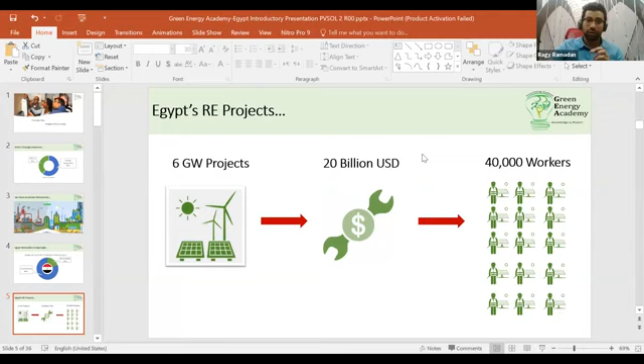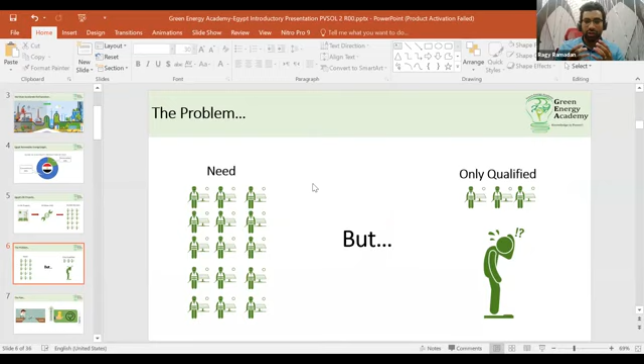These investments and projects will require thousands and thousands of qualified workers and engineers in the field of renewable energy, either solar or wind. This leads to the problem for which the Green Energy Academy was founded since 2011: there is a big need for qualified workers, engineers and employees, but the qualified personnel in specific countries are very limited, which creates the problem.

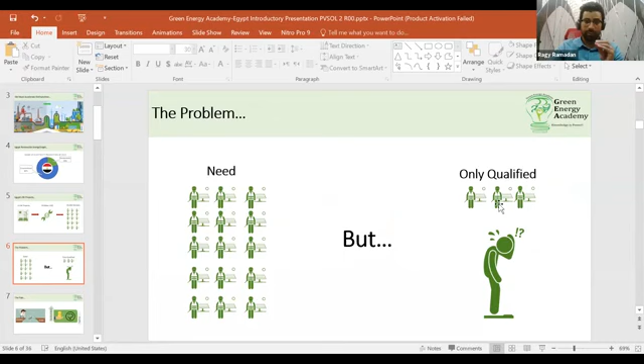This problem actually comes from the fact that there is a big gap between what we learn in schools and other educational institutions, such as universities or engineering colleges, and what the market actually needs - here I'm talking about the job market. You may face situations where you need to start up your business, or join a company or secure a vacancy, and this vacancy will require a lot of technical and soft skills that you didn't learn in university or school.

So the other problem is that it happened with many of us: we paid a lot of money to other renewable energy training providers and got very little quality that was not up to our expectations, failing to gain the required skills in order to join the job market or start up our business.

And from this perception, the Green Energy Academy came. The Green Energy Academy is an Egypt-made international company that delivers world-class renewable energy services, specifically in the fields of trainings or capacity building, consultations or consulting services, and engineering.

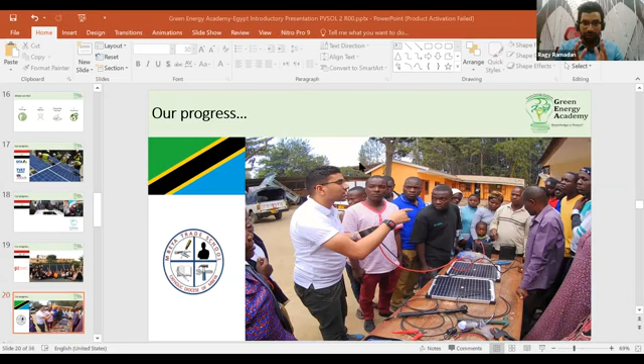We also, in addition to the trainings, delivered consulting services in order to help small companies or startup companies in the field of solar energy to register their company, to business develop their company, to help them generate leads, and also to help them in their early stage project management and early stage project references, such as doing engineering for some projects and installations for some projects.

In this slide, it was the end of our introducing the Green Energy Academy.

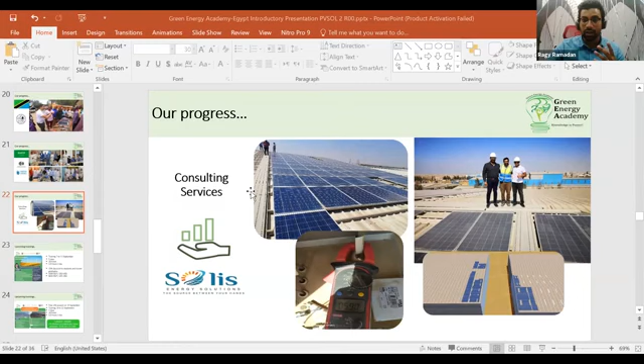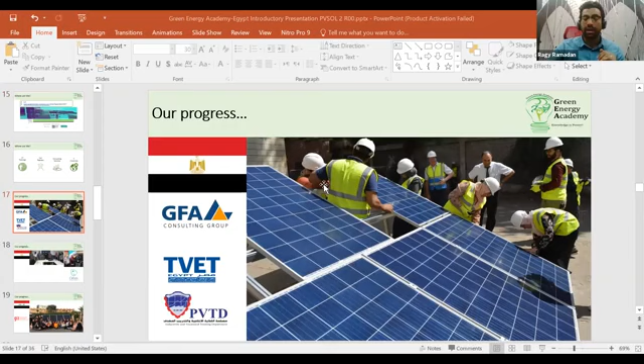Now, talking about the trainings - in the last period we announced about 3 online trainings. One of them, which already passed, is the Wind Energy Basics. It was from the 7th of September to the 11th of September, for 5 days.

The upcoming training will be the Solar PV online training, the professional design and simulation of on-grid systems using the software PV*SOL premium 2020. This is going to be from the 18th of September to the 22nd of September, which means it is starting this Friday, already starting soon.

We have many registered and confirmed attendees. Some of them are also attending our info session here. The training will be for 5 days, a total of 18 hours, 3.5 hours per day.

Talking about the investment or the fees - the standard fee is 4,000 Egyptian pounds or $250. However, if you are a student, an engineering student, or a student with a background about grid-connected solar PV systems, you are eligible to receive a 15% discount. Either you are a student, a recent graduate of the year 2020, or a recent graduate of the year 2019 - working or not working, you are eligible for a 15% discount, which means you will pay only 3,400 Egyptian pounds or $212 instead of 4,000 Egyptian pounds or $250.

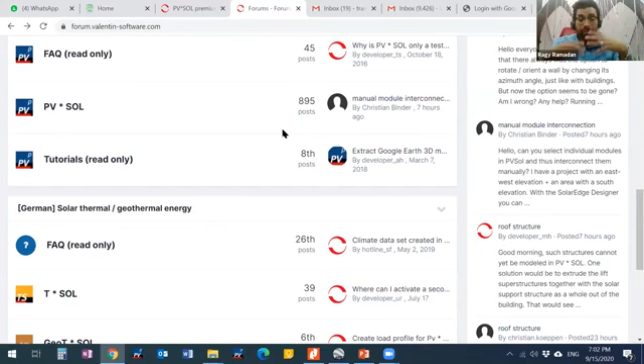Let me share my screen with you. You can easily visit the PV-Sol forum here. In this forum, you can add any question or topic you don't understand, and in less than 24 hours you will receive an answer, either from the PV-Sol Premium developers or from other members participating in the forum. Okay, sharing my screen back to the slides.

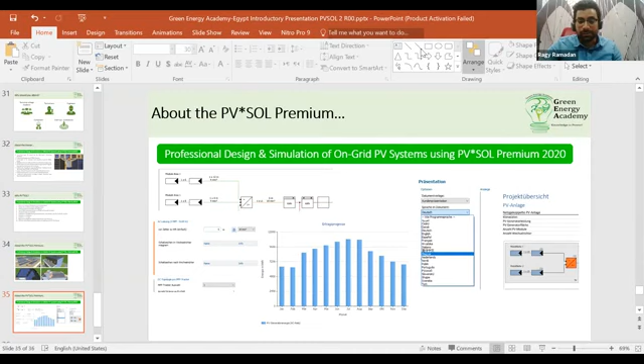Now we will open the software and go through it quickly. As you can see, these are some photos of the software. It can do rooftop systems of many types, as well as roof-parallel systems, for either residential or industrial facilities. It can generate single line diagrams and graphs and diagrams for energy productivity, producing a complete, professional, quality design and simulation of PV systems.

Now I'm sharing my screen again. I am opening PV-Sol Premium 2020. PV-Sol Premium is developed by a company.

Called, let me share the screen.

It is developed by a company called Valentin Software, under the product name PV-Sol Premium. The company is based in Berlin, Germany, and besides PV-Sol they also develop other products like T-Sol, which is similar but designs and simulates solar thermal systems, such as solar water heaters.

Either standalone systems or central heating systems. So I'm opening now the PV-Sol Premium. This is the interface of PV-Sol Premium 2020. There are two products: PV-Sol and PV-Sol Premium. PV-Sol is only for design and simulation of 2D systems, it doesn't have 3D. PV-Sol Premium has both 2D and 3D systems.

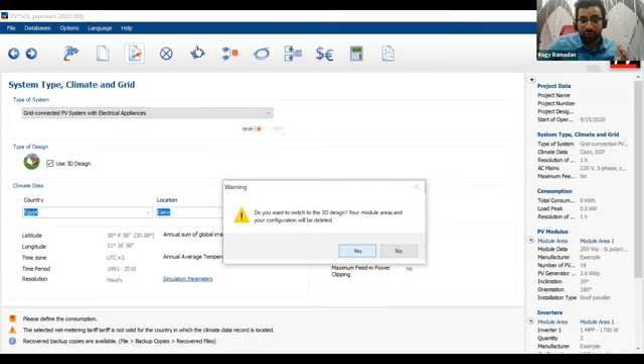Then you can select either a 2D system, or tick this option to have a 3D system. You can also select the country and location here. All countries around the world are available.

And if there is a specific location that you don't know, you can actually create climate data or location data easily from PV-Sol and save it. Here you can also enter the technical details about the AC mains, like voltage, number of phases, and power.

Moving to the next page, which is called consumption - here you can define your consumption either individually, for each load, how many watts and how many hours each load is working, or, which is what we'll mostly do in our training, you can select monthly annual consumption for net metering.

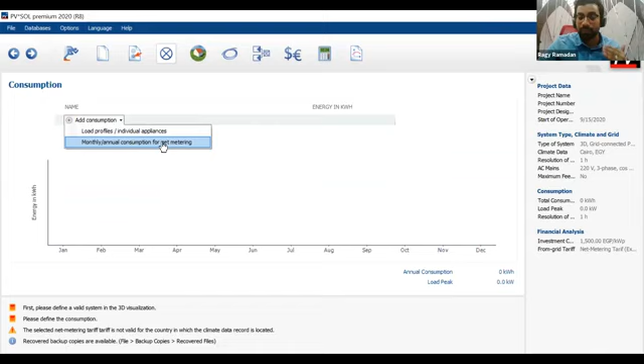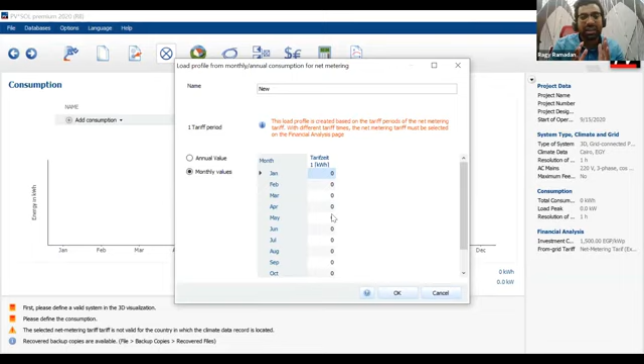Once you click on this, you will be able to enter your client's consumption for each month. You do this because you need to compare your solar energy production and know how much money you will save from solar energy.

Then we can go to the 3D. If I click on edit 3D it will not show anything, so let's go back to the welcome screen. Let's, for example, click on any of these projects so you can see a real project.

Now it is open. It's opening an old project, which I need to show to you. This was a project for a company or a factory called Electro Technique here in Egypt.

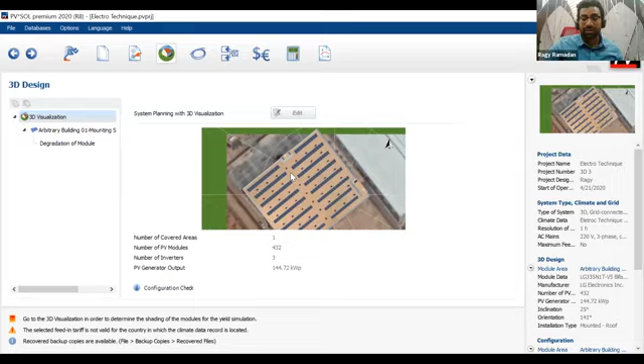This project was a grid-connected PV system, and we have done the 3D visualization. After you do your 3D design, you will find a photo like this. If you click on this, you'll be able to open the window for the 3D tool. This is a project that was done by me.

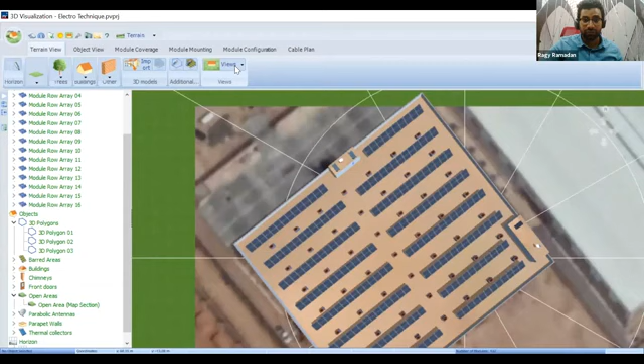Here you will be able to extrude buildings. For example, if you see the top view, you will be able to get images from Google Maps or Google Earth Pro, put this image here, and select the perimeter of the building. You will be able to extrude the building, and from extruding the building, add solar PV modules.

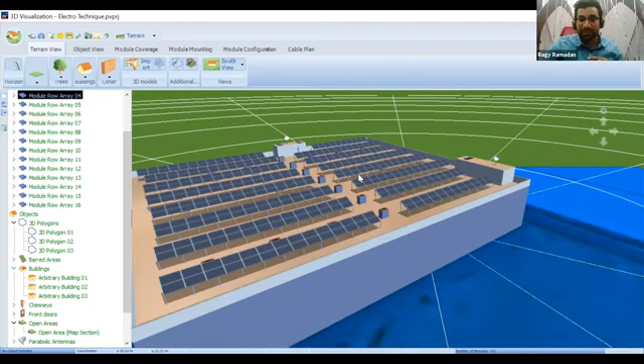Adding the solar PV modules can be done in many ways. Either you select fill area, or you drag rows of solar like this, or you fill the whole available area of the system.

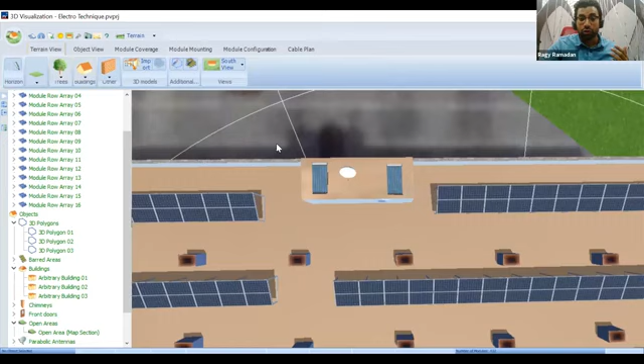Of course, in the 3D, you can define objects such as rooms, obstacles, doors, and other obstacles on the roof. You do this because you need to do the shading analysis of your PV modules.

Coming to shading analysis, you'll be able to see the sun and select which day of the year you need to check your modules. Going through this, you'll be able to see at which times shading happens, either from the modules themselves, which we call self-shading, or from other surrounding and nearby obstacles, how much shading, what is the severity of shading, and how long the shading lasts for each module.

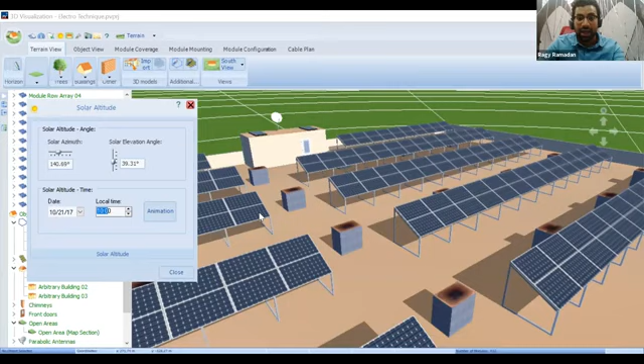After that, you'll be able to assign your modules, which means you will be able to assign inverters, as you can see for this example, it's an ABB inverter, to your modules.

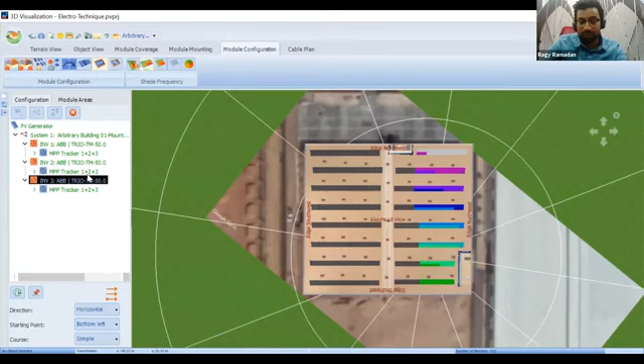Then, of course, this is not the end of the 3D visualization. We can spend days and days mastering the 3D visualization, but I'm just giving you an example.

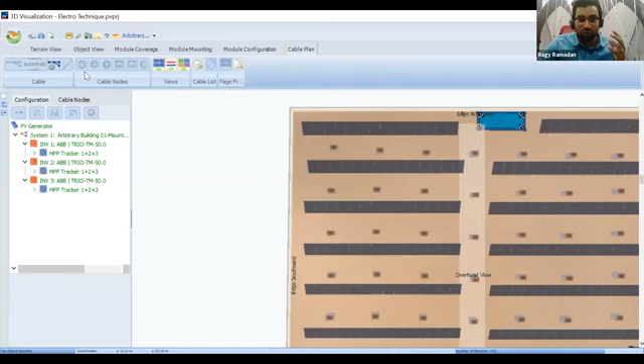One of the new features of PV Sol is that it can also do cable planning. So you can not only generate the layout, but like this one, for example, you can export this layout to AutoCAD.

So there is no need to do your system in SketchUp, then go and do it in AutoCAD, then go and do a financial simulation in Excel. No, everything you can do using one software, which is PV*SOL premium.

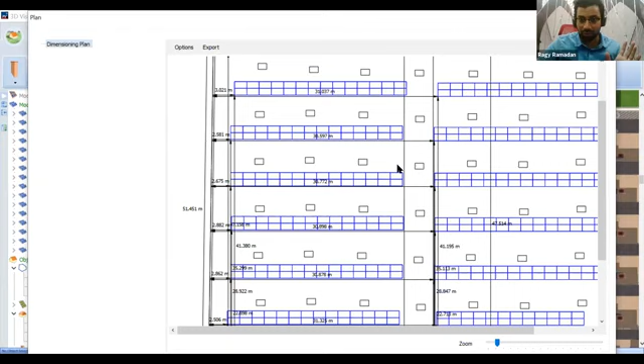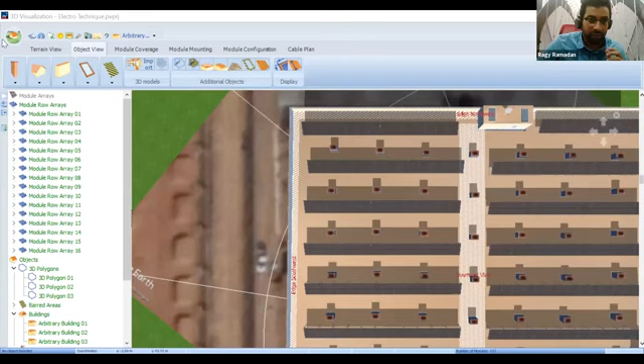The name of the program is PV*SOL premium 2020. This is the name of the program. You can adopt the data, and you can do the shading analysis.

After that, you can go to the next page, which is about the cable. Now, as you can see, this is a good example that PV*SOL premium does the shading simulation for each day of the year, starting from day 1 to day 365.

So it is simulating, making the sun go around every day all over the year, in order to know how much energy each solar module or each solar panel will produce.

At the end of the report, it will show you how much energy your PV system will produce, how much energy your PV system will lose, and based on this, it will give you the performance ratio and specific energy yield. You will be able to know how much you will lose due to shading, if your system is undersized, or if your system is oversized and you need to go down.

It is taking time here because there is shading in this particular example I am doing, and that's why it's taking time, because there is a lot of shading. But if there is no shading, then it will take less time. Believe me.

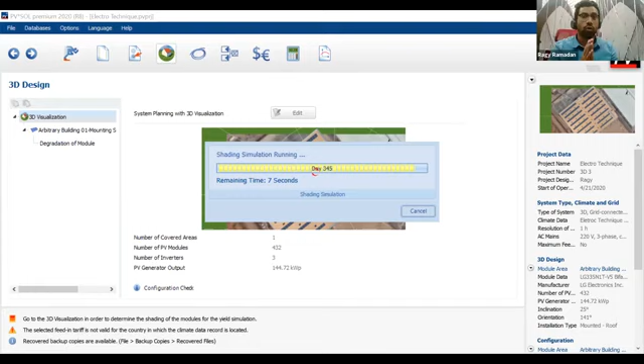Shading on the modules is a huge problem. It causes conflicts and fights between solar energy companies and project owners. Unfortunately, many companies and technical teams in Egypt and in many parts of the MENA region do the design not in 3D, without doing shading analysis.

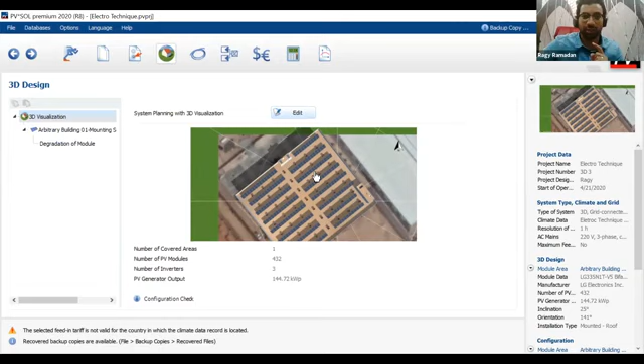Then the project owner can hire a consultant, and the consultant will say that there are a lot of losses due to shading. Please take care of this shading analysis, and PV*SOL premium is very unique in this shading analysis.

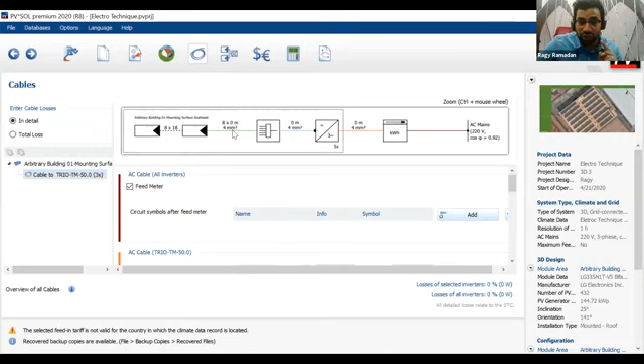Going to the next page, which is cables. Here you can see this single line diagram showing the panels and inverters. You can specify how long your cables will be and put in the length of each cable, and automatically PV Sol will calculate for you the suitable size of the cable for that length.

For example, if the AC cable is 100 meters long and you click here on calculation, it will tell you that you need to use a cable of 70 millimeter square in size. You can change this, whether it's copper or aluminum.

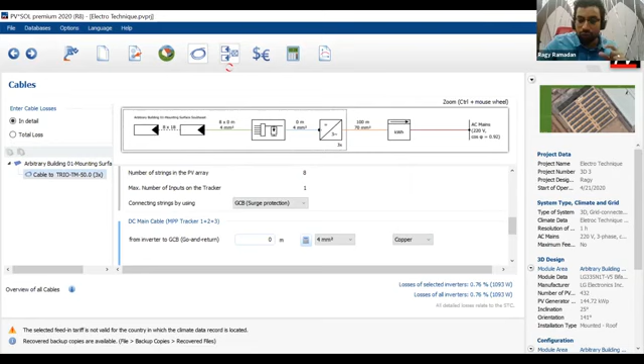There are many other features under the cables page, and this single line diagram will be shown in your final report. It can also be exported into PDF or AutoCAD, and also the layout can be exported into PDF or AutoCAD. This will save you a lot of time because you won't need to go to AutoCAD and work on CAD software to generate layouts for the panels.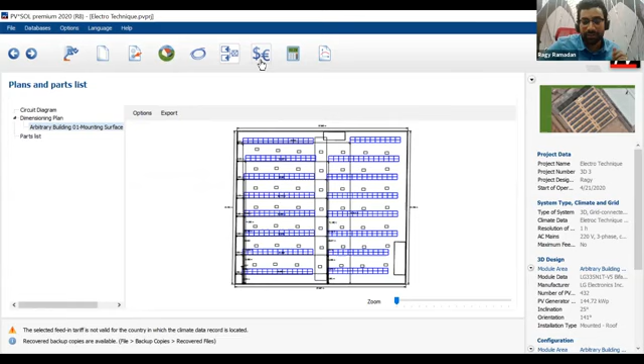The next page is about financial analysis. Here you can add the cost for your system, the cost for labor, the cost for components, the cost for periodical maintenance, and you can also add if there will be interest or loans, and by the end you will receive a financial analysis showing you your cash flow.

When are you going to have your money? What is the percentage of profit, or what we call return on investment, ROI? And even here in the applied feed-in tariffs, you can create schemes.

For example, in Egypt we have something called net metering, which means that if you install a solar PV array on your roof, you can reduce your consumption from the grid. At the same time, if you have extra power, you can inject this extra power to the grid. At the end of the year, if there is a lot of power injected to the grid, you can redeem these kilowatt hours in the form of money.

How much money? This can be entered here, and the financial simulation will do the whole economic evaluation for you. Then if you click on results, it will do the simulation for you.

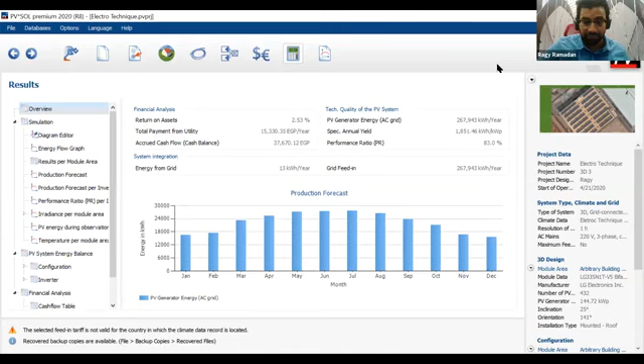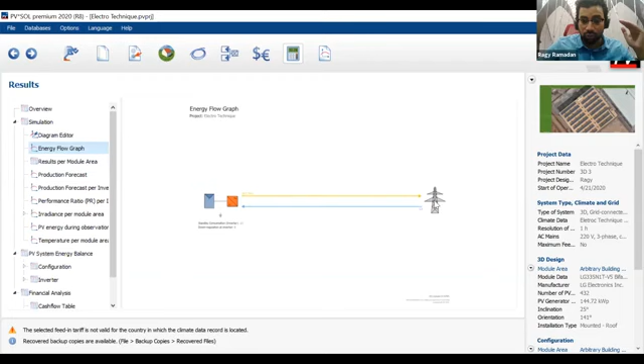To the left here, you can select which results you need to see—simulation, how much energy you will get per year, and also how much energy you will inject to the grid. You can see the production forecast and many other results.

And also the financial analysis, like how much is your payback—sometimes they call it the amortization period—and how much is your return on assets, how much is your profit, and so on. At the end, you click on the presentation.

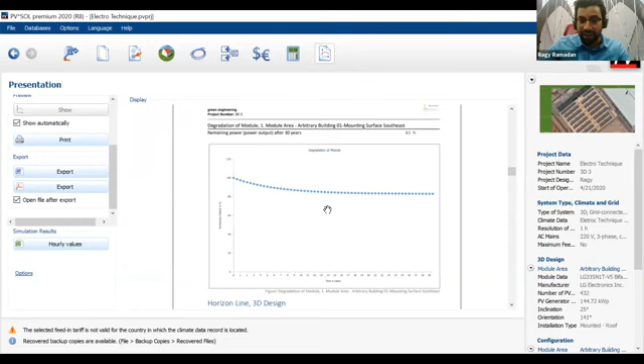You will find a complete design and simulation report. You can have it either as a PDF or Word file. Yes, you will find everything here—all of the data, and you can present it to your clients.

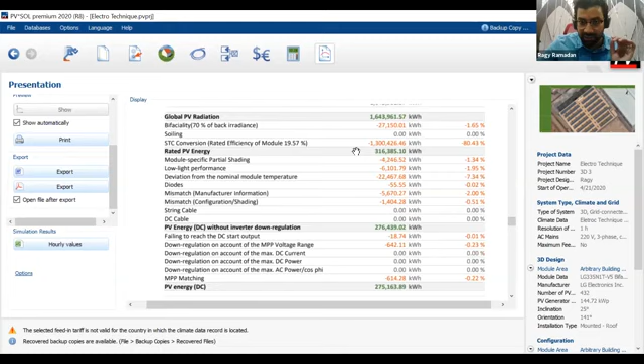Simulation results, data sheets, production forecasts, inverter data, and PV system energy balance, which is extremely important. This page tells you how much energy you lose due to partial shading, how much energy you lose due to high temperature, and what will be the final energy output from your inverter. This is very, very, very important.

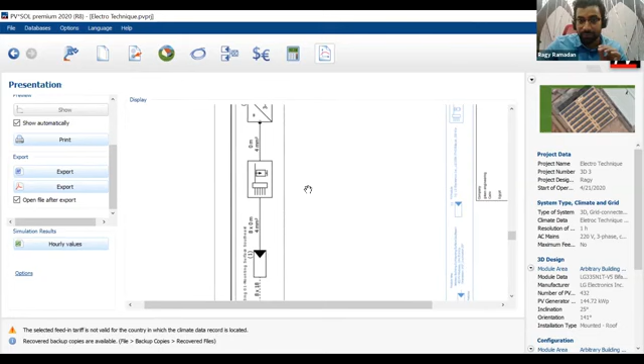You will also have the single line diagrams ready for you, including all of the devices that you added. You will also have the layouts ready, and you can take screenshots with the camera in the 3D visualization for your system from any position or angle that you may need.

Okay, so this was a brief about the report. By the way, a very important feature about PV*SOL is that it can generate reports in 20 different languages, including Arabic. So if you are submitting this to an authority that needs documents only in Arabic, like in Saudi Arabia, you can do this easily just by clicking that you need the program to generate the documents in Arabic.